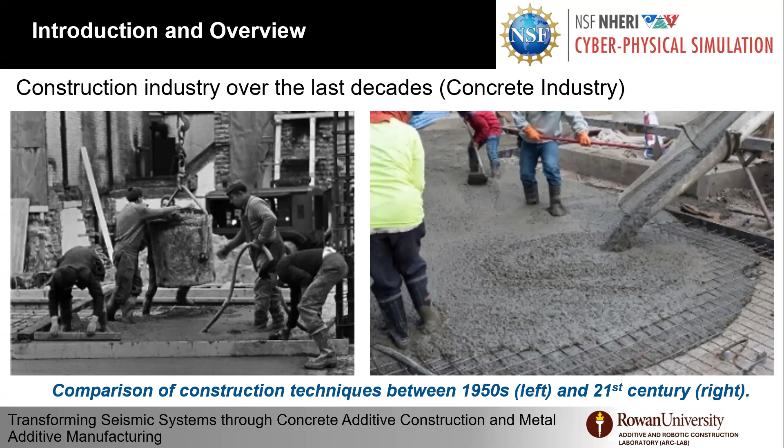But I just want to make sure that we are doing the same business over almost a few decades the same way. And my presentation is not intended to be a replacement of those methods. It's just introducing a new construction technique, a new manufacturing technique that could go hand in hand and solve problems that exist in the conventional way of making steel and producing concrete structures.

So in the background, I want to be able to have the audience engage with me. So I'm using ISO ASTM 52900 for additive manufacturing processes. You can see here, ASTM recognizes only 7 techniques. The first one on the top left side is sheet lamination. It's basically gluing steel sheets with adhesive to build your structure. The second method is material extrusion, and this technique is actually suitable for concrete, metal, and polymers.

And binder jetting is basically using the powder on the bed and using additives or binders to glue them together. This also is suitable for concrete, metal, and polymers. Material jetting is mainly polymers. If we keep going, powder bed fusion is metal and polymers, and there are different processes like direct metal laser sintering, selective laser sintering, selective laser melting, electron beam melting, and selective heat sintering. The other technique here is vat photopolymerization, that is mainly for polymers, using UV light for curing resins.

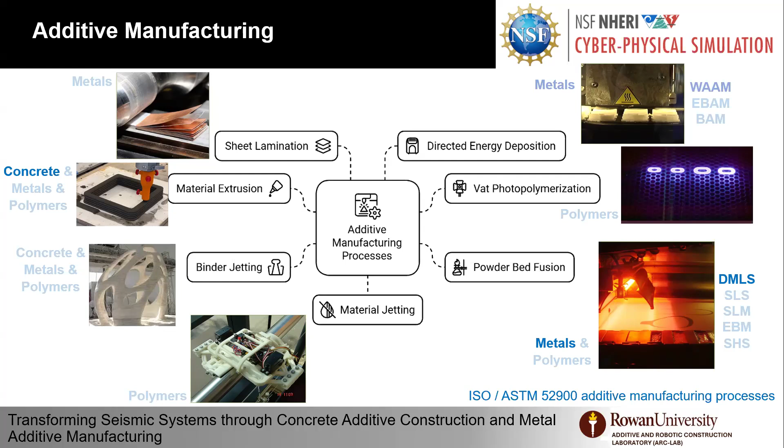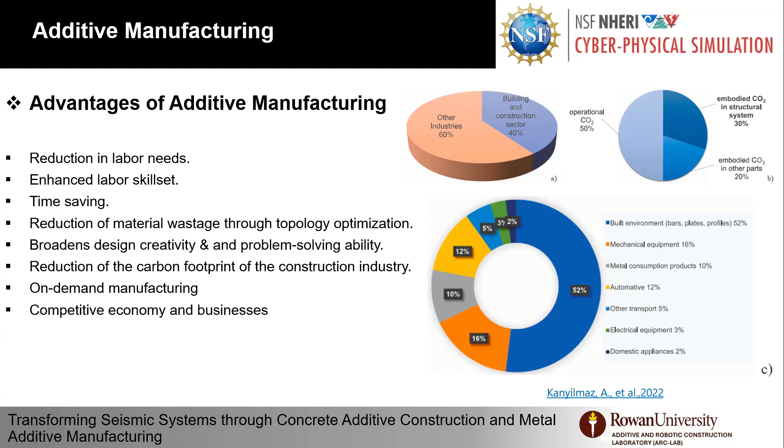So what are the advantages of additive manufacturing? We can actually reduce labor need, enhance labor skill set, save time, reduce material wastage through topology optimization, broaden design creativity and problem solvability, and reduce carbon footprint because we now produce more optimized structures. We're not wasting material in low stress regions. It also could introduce on-demand manufacturing. So if you have a hazard, you can actually print elements to respond to this hazard, and also provide a competitive economy and businesses, especially small businesses.

So I'm going to be changing between concrete and metal, so please pay attention with me here. So the first one is concrete additive construction. Our lab classified construction into three techniques. The first one is conventional construction. We've used that for decades. So using formwork, placing reinforcement, casting concrete, stripping formwork, you will have a structure.

Most of the techniques that we have right now for 3D printing of concrete rely on what we call hybrid construction. So basically you 3D print shells or forms, place reinforcement, and post-process by casting. What we try to do at our lab is to have a complete inline process where we can 3D print or additively construct structures with inline reinforcement, and also use topology optimization to create compression-only structures and tension-only structures.

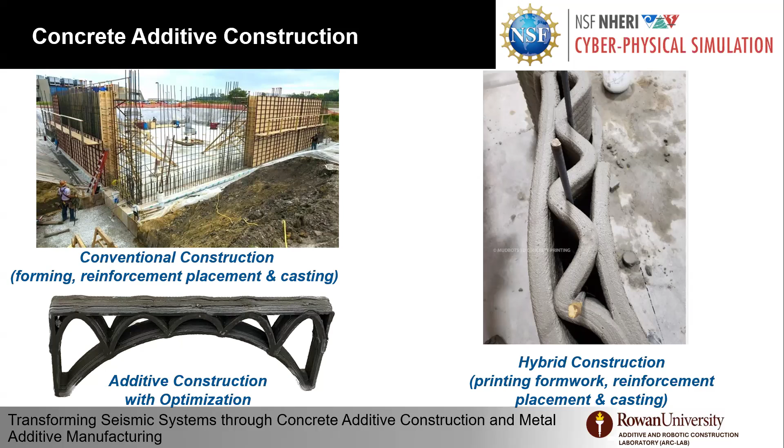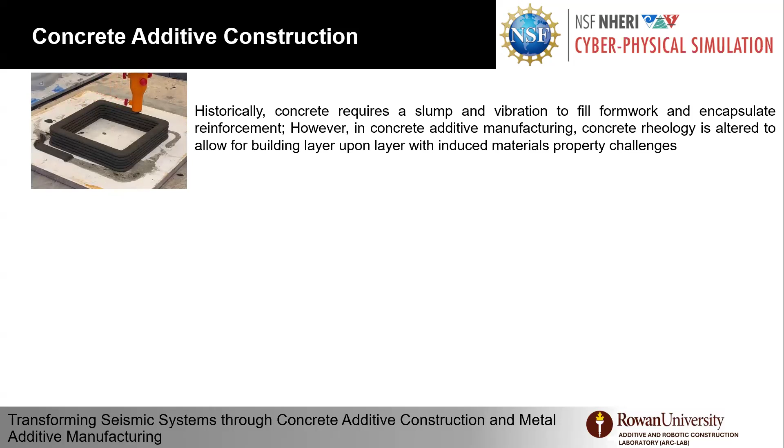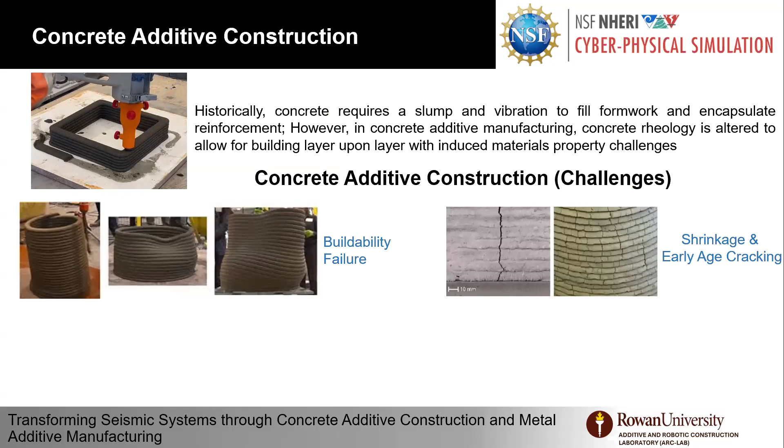This is not for a structural application, it's mainly for material development, but there are a lot of challenges in this process. The first one, you will get some collapses and learn from the collapses. The material is fresh, gaining strength over time, so there are buildability failures. There are also shrinkage problems, cracks due to shrinkage, and also early age cracking.

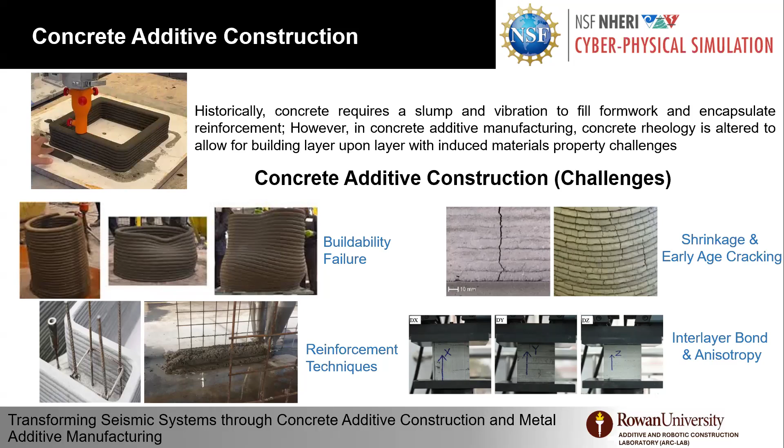And we also have interlayer bond issues and anisotropy due to the layer by layer nature of 3D printing. So you basically could have material properties change in the X, Y, and Z directions. I'm going to jump back to metal.

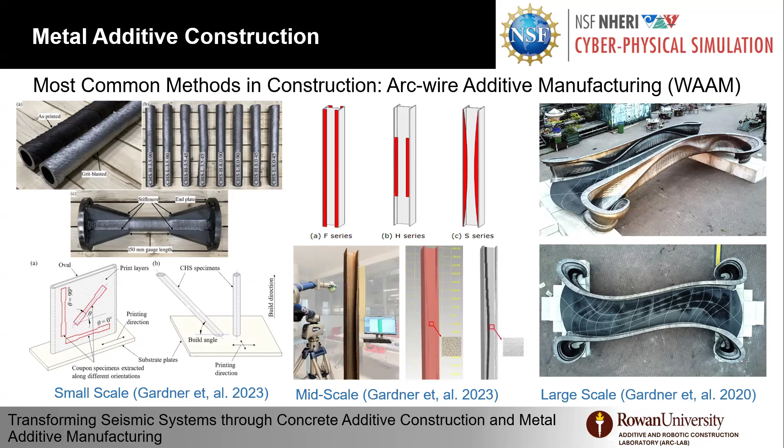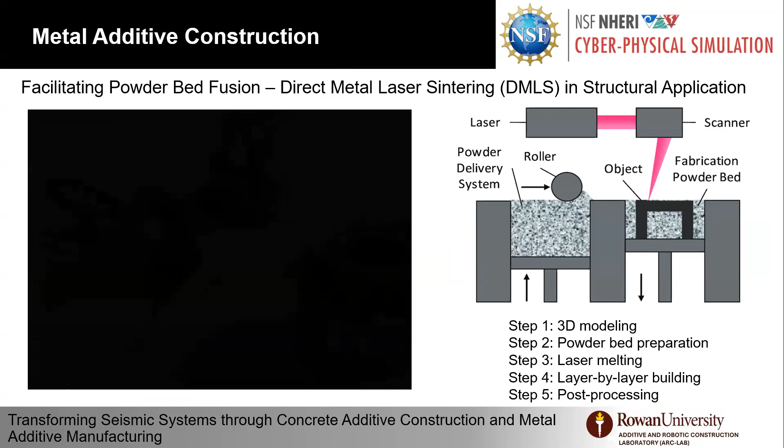However, in our lab, we actually try to use powder bed fusion, with the technique called direct metal laser sintering, in structural applications. As you can see here in the video on the left side, we can create objects using metal powders and a laser to sinter the layer as we intend. As you can see here, an object is melting or sintering inside the printer, and you can keep building the structure layer upon layer.

The big challenge in this technique actually is the build volume. The printers are limited in size. Even now, there is a lot of advancement. I was able to discuss with the company that now we are able to print like 5 feet by 5 feet by 5 feet objects.

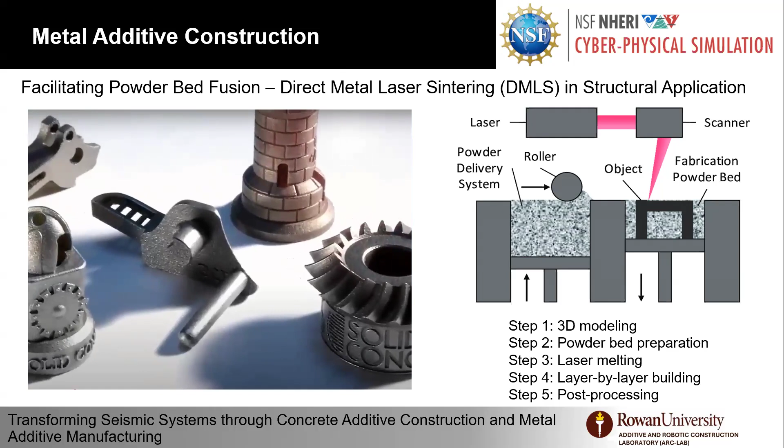So the technique here, we have 3D models for sure, powder bed preparation, using a roller to slide the powder, using a laser for sintering and melting, and building layer by layer. The layer height in this technique is actually the particle size of the metal, so it's like 40 microns, and it also may require post-processing like heat treatment.

So here are the factors that could affect mechanical properties. For sure, the powder used: we can use stainless steel powder, titanium powder, or nickel. The laser power, the scanning pattern, scanning speed, layer thickness, bead blasting, and heat treatment. Those also have impact on ductility, ultimate strength, modulus of elasticity, yield stress, anisotropic behavior, and fracture toughness.

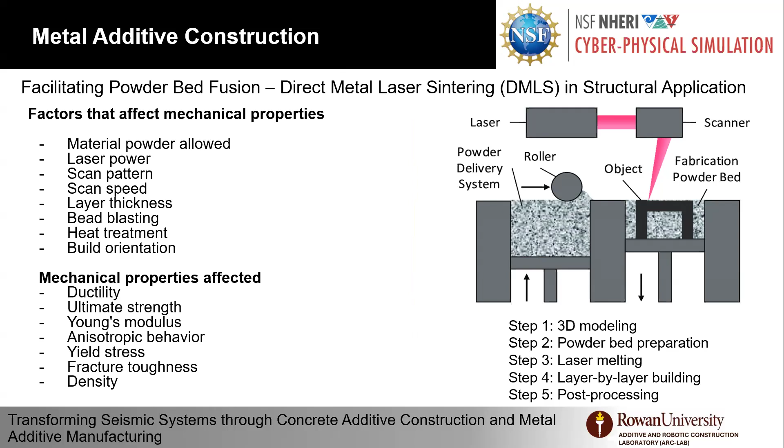So here I'm done with my background. So I'm going to spend some time introducing our lab. So our lab here is myself. I have 4 PhD students in our group. Jenna is working on topology optimization for both concrete compression-only and tension and compression structures. Anthony is working on a rocking system that we're going to present today.

Ali is working on a very nice project developing material for in-air and underwater 3D printing. Hamdi Farhood is working on all the steel-related research in our laboratory, from additive manufacturing to other non-additive manufacturing applications. And Zain Hanoun is a master's student working with us on developing material for 3D printing.

So our lab focuses on 2 research areas. The first research area is, as I mentioned, concrete additive construction. A lot of work in topology and structural optimization, developing hazard protective systems, lower carbon concrete material, lower embodied carbon, inline reinforcement techniques, and multifunctional structures.

In the metal side, we work on topology optimization, hazard systems. We also have at Rowan University a cold spray laboratory. We work in collaboration with the chemical engineering department to repair corroded steel structures, and a research area that we are starting very soon is material printing.

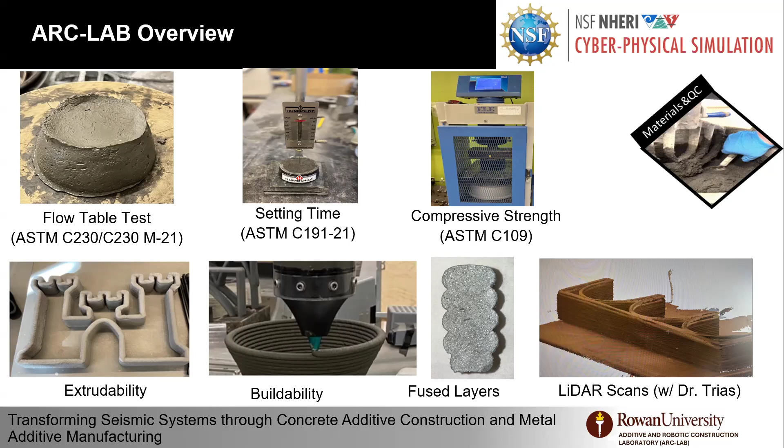We also collaborate with Dr. Trias from Rowan University on using LiDAR to capture geometry and identify cracks as we print. Here are the systems that we have. We have 3 different systems. We have a printer called SCARA Elite Roadrunner. It can print a 20 feet by 7 feet by 7 feet print volume. So it's about 6 meters by 2 by 2 approximately.

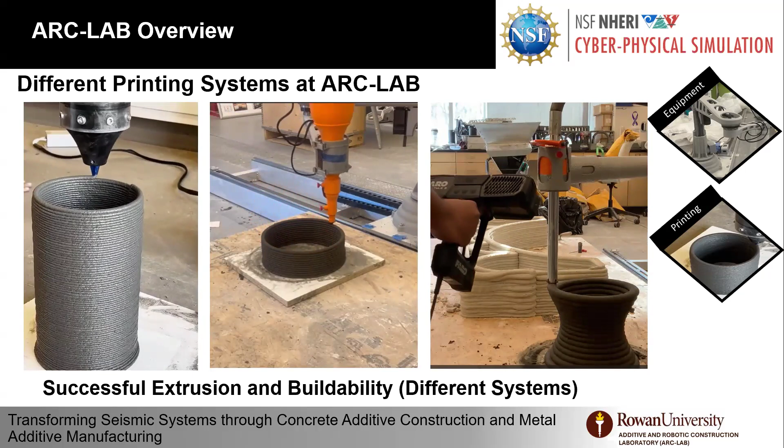We can use small tubes to print very small cylinder elements, with the 8 millimeter nozzle on the left side. In the middle, we also have another system that enables us to print from 8 millimeter up to almost 1.5 inches. And we have on the right side here the 3D printing with full utilization of the equipment using the pumps that we have in our lab. So basically, the right side is where we use the pump.

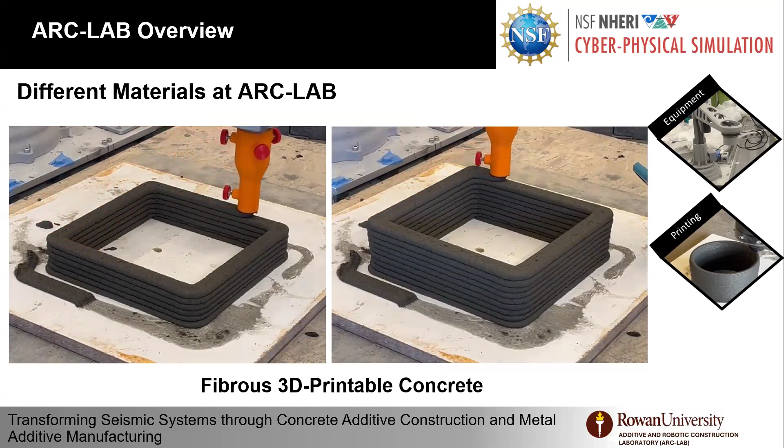We also develop materials. We realize that the material is brittle, as concrete, as you know, always is. So we incorporate fibers into the material, steel fibers of different lengths. We were able to print with 4.5 millimeter, 6 millimeter, and up to 12.7 millimeter steel fibers. So as you can see here, we are using the square as a benchmark for cutting samples, testing cubes and flexure beams, and make it like a standard for the quality of the print. We also take pride in the quality of our prints.

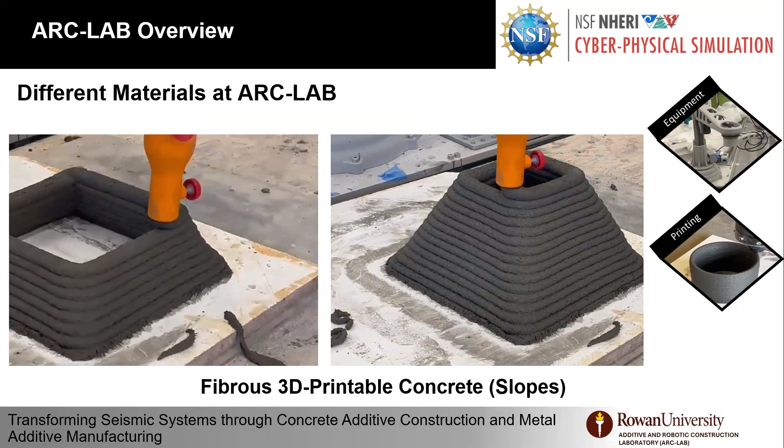We actually were able in our laboratory to print in slopes up to 50 to 55, even 60 degrees from vertical position. You can see here we start from the base, almost zero slope, and gradually change the slope as we go up. And as you can see here, a lot of the material is still fresh, it takes like 60 minutes to start setting. So a lot of challenges as we print, and a lot of deformation that happens in the layer that we don't see, but it's micro scale. And as you can see here, it's able to withstand the load, especially the first few layers, which have smaller dimensions.

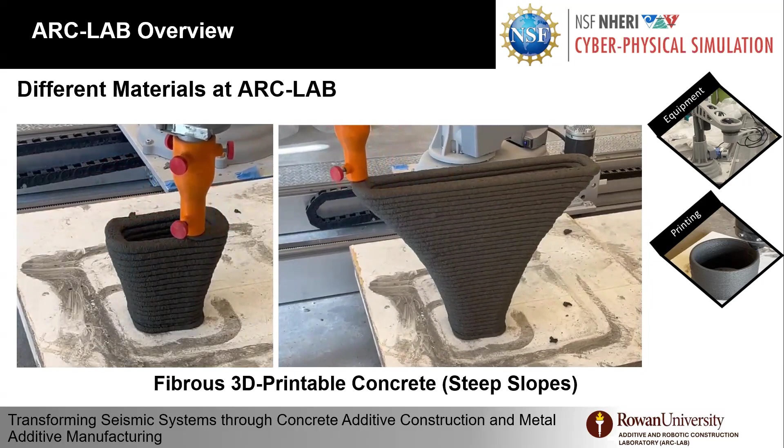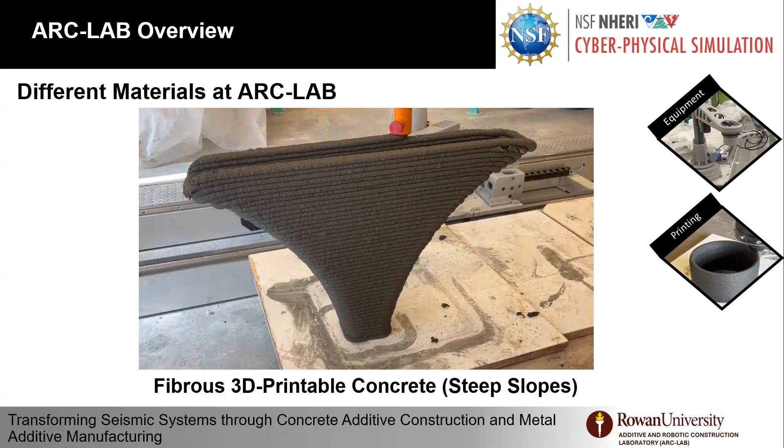We actually test also what's called stress testing. So we print until we fail to understand the material behavior. So as you can see here, we keep printing on a slope, and this one, if you take a tangent at the end, is almost like a 65-degree slope, but with a lot of deformations on this overhang. As you can see here, the material is almost hanging in the air, and now there's like a fight between the material trying to collapse and trying to hold itself, and that's actually the slope that you can say is a safe slope to print.

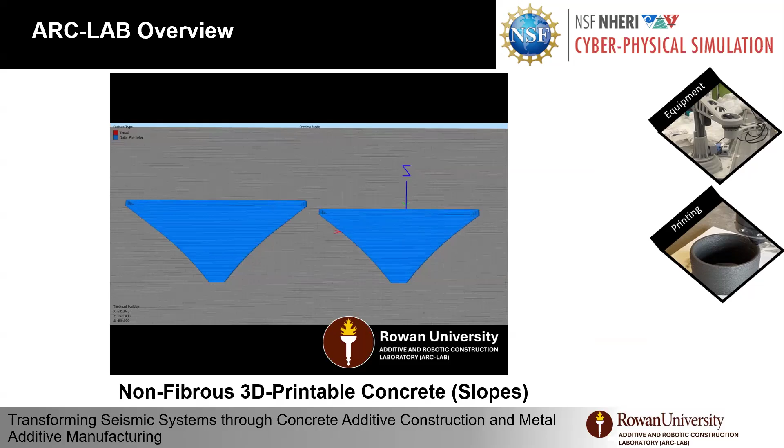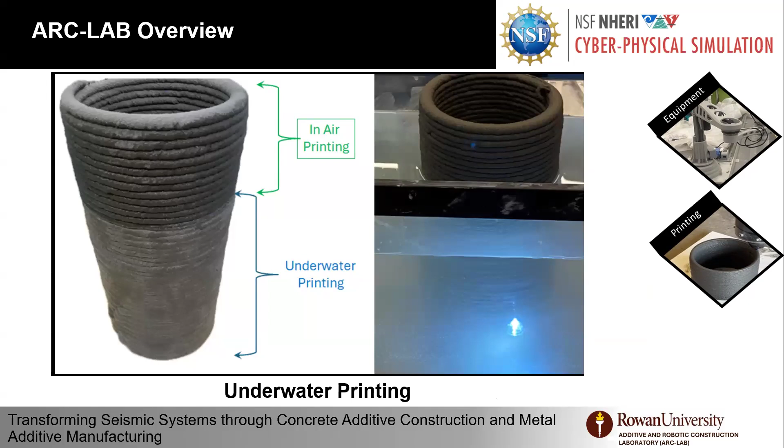We also have research that started as an idea in November 2023, where we actually tried to 3D print underwater. So the idea here is to 3D print in water tanks and understand the material behavior and interaction with water. There are a lot of challenges, more than in air. You can say that water buoyancy can help reduce the weight of the structure, or the gravity inside the material. But there's a lot of interaction because concrete is cement, a water-based material that interacts with water, and there's a lot of washout that happens.

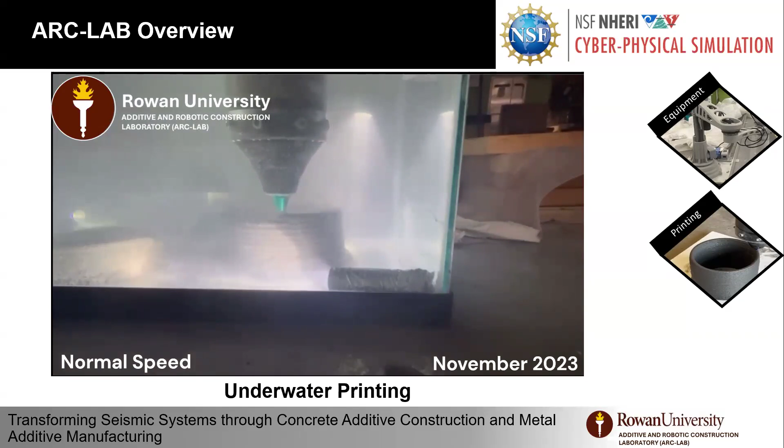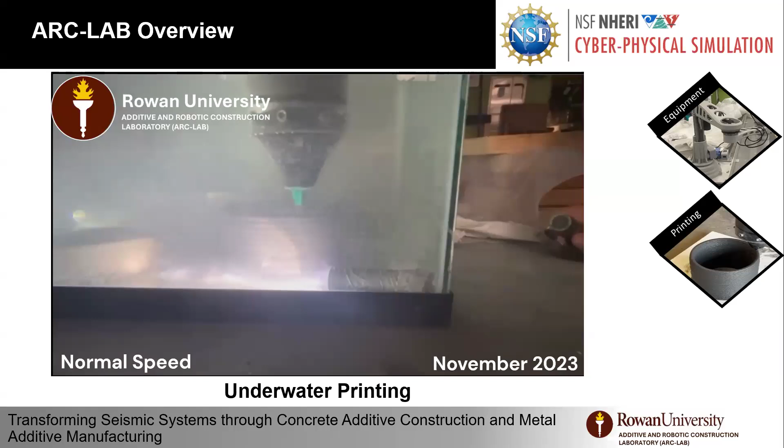So here is a video showing 3D printing underwater in a water tank that we did in 2023. The idea was to print underwater and off water, and there are a lot of applications for that: bridge casings, repair, and even artificial reefs in the water if needed. So you can see here, we just jumped the video to the end, and we are able to print our structure underwater and off water.

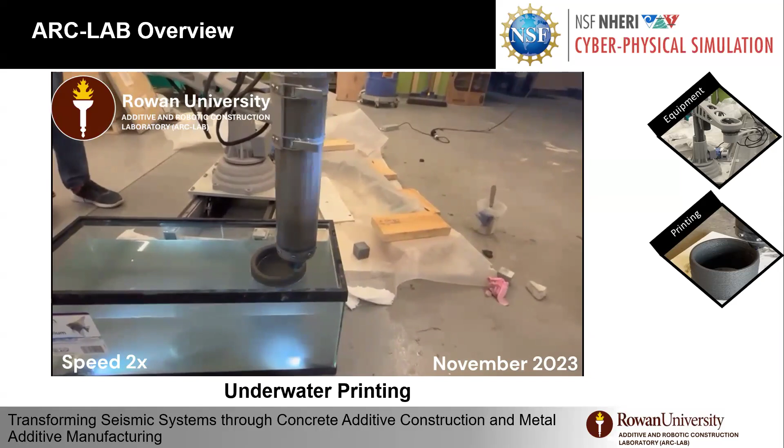I don't want to spend like 2 minutes watching this video, but at the end of the day, you can see that the same material is extruding underwater and off water. So we have an active research area on understanding material behavior underwater and off water for new waterfront construction. So I think this is enough prerequisite material to start the actual two projects that we're trying to start here.

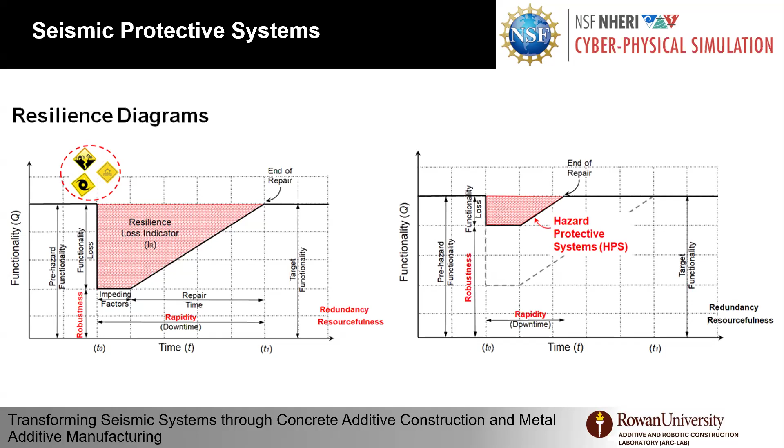We have a column end with rough surfaces that later had concrete cast around it for a socket connection. We also have end tubes to protect the concrete from spalling. We also have unbonded rebar for energy dissipation through yielding as the structure rocks. And the top connection was a reduced concrete section to accept the end of the pre-stressing. The rebar was also connected to the cap using holes that were all grouted together.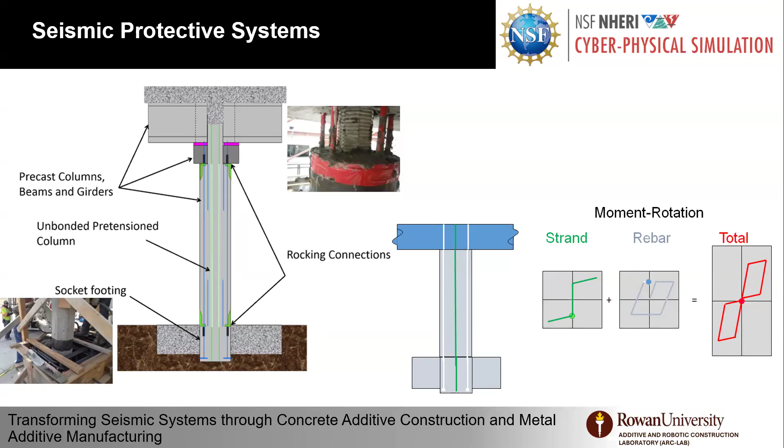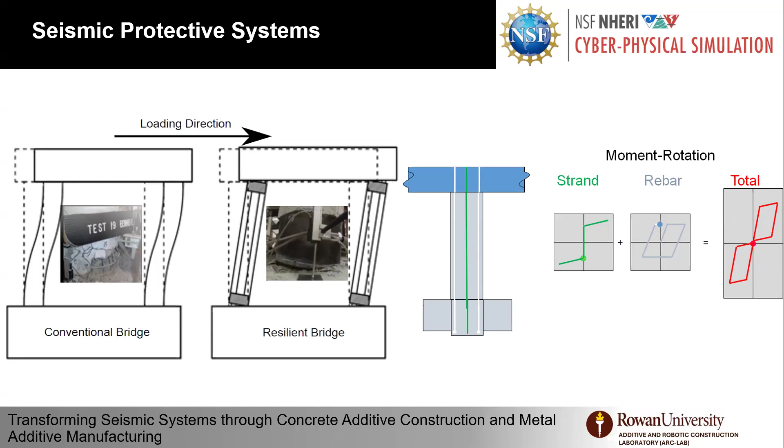So the system relied on the pre-tension to self-center, while the rebars dissipate energy through an internal yielding mechanism. As you combine them in the moment rotation curve, you can achieve self-centering. So we compared the system to a specimen that was tested in 2004 as a conventional bridge system with normal design, where we observed a lot of concrete damage, rebar exposure, buckling and rupture, and that's because we actually shifted the behavior from flexure and buckling into a rocking behavior.

So here is the specimen at the University of Nevada, Reno, a 72-foot-long bridge at quarter scale. As you can see here, we are using this ground motion, 2.3 times the Northridge earthquake, and as you can see, the bridge is rocking back and forth on predefined interfaces between the columns and the foundation, and the column and the cap.

There will be a zoom-in view in a few seconds to show you how it rocked back and forth. And after the earthquake, you can see how vertical and plumb the column is, compared even to the background steel frame. As you can see here, the rocking is back and forth, and thanks to the pre-tension pre-stressing that brings everything back.

We faced a lot of challenges in the aftermath of this testing, because a lot of ruptures happened in the rebar that we were not able to inspect because everything recentered nicely. However, as you can see here, the tubes actually prevent the visual inspection too. As you can see here, the only crack that happened to the column was at 13 percent drift ratio.

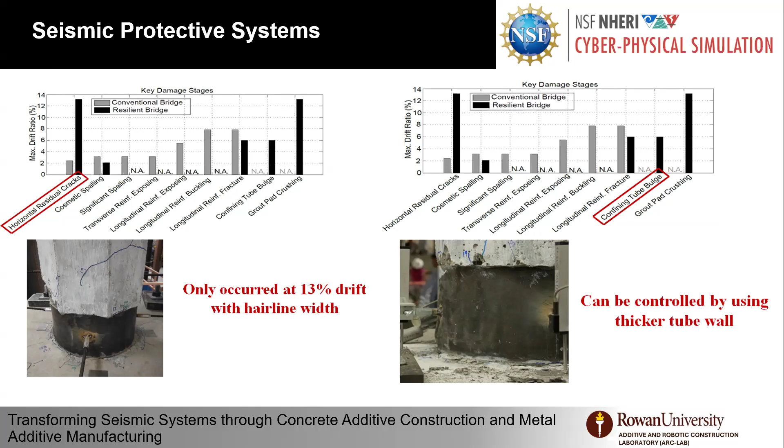It rocked on the surface. The foundation also got some cracks and spalling due to the rocking motion. The steel tube at the end had a bulge due to the high dynamic loading. We also had a big challenge here where, before we saw cut, we actually knew that the rebar fractured from the sound as they fractured during the test.

We did a lot of post-processing using low cycle fatigue and acoustic emission to identify the fracture. We tried to verify that, so we saw cut all the connections, and you can see here all the outer rebar fractured, and that was a really big setback because we try to make sure that we can have a resilient system that resumes functionality quickly. It was good for the purpose of emergency vehicles because the bridge is still standing. However, after recovery, you have to replace it.

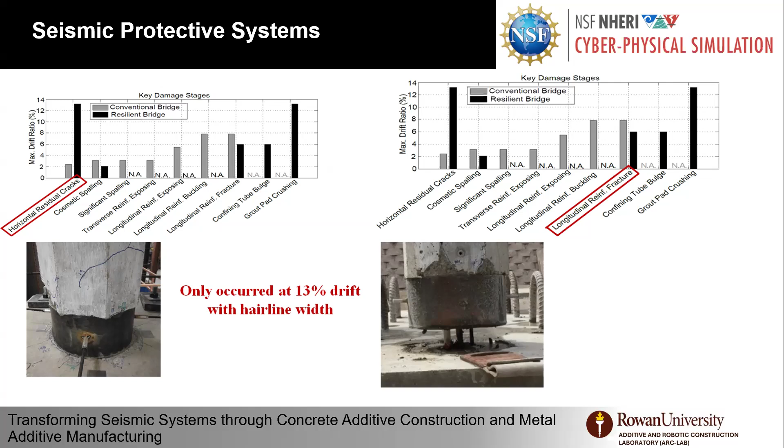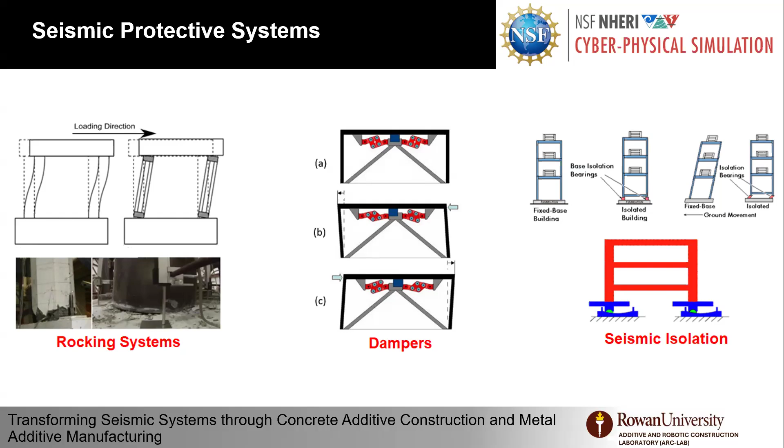So we thought, can we enhance the system? So first, we tried to study different systems for seismic mitigation in bridges. The first one is the rocking system, as we discussed, and the use of dampers, either liquid dampers or friction dampers, and also the famous seismic isolation, which basically shifts the period of the structure to reduce the acceleration of the structure. We thought, can we actually get the benefit of all these techniques using a new system enabled by 3D printing?

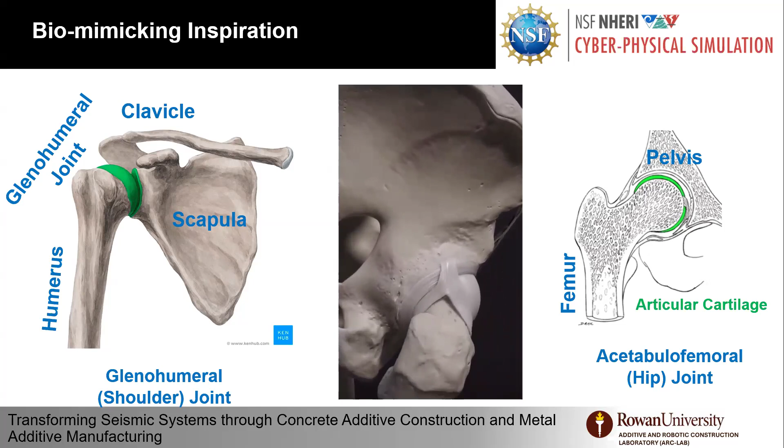So we also thought of bioinspiration, the way that we have our joints. The first one is shoulder joints. You can see here a lot of curvatures and ball and socket connections to allow free movement and mobility. Another joint here is the hip joint, rotational in all degrees, and it enables mobility. And also, in the ball and socket connection, you have articular cartilage, which is a soft tissue to damp the movement. In our body we don't like friction because it's painful, but we can use the same concept and be inspired by those to build a new structural system.

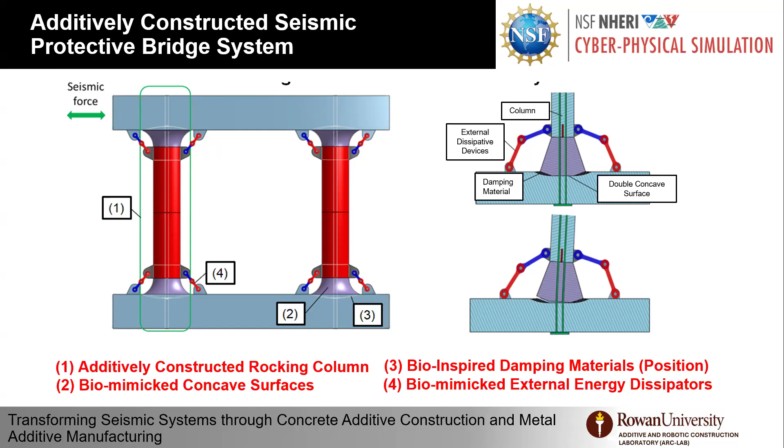So here, what we tried to do is one-directional loading first. We have the additively constructed rocking columns, post-tensioned and not pre-tensioned in this case, with a unique end design based on concave surfaces. We can explain why we are doing that in a moment. By positioning a damping material, inspired by joints, we can also achieve damping of the forces and energy dissipation to substitute internal rebar. We also thought of using external energy dissipation based on rotational friction.

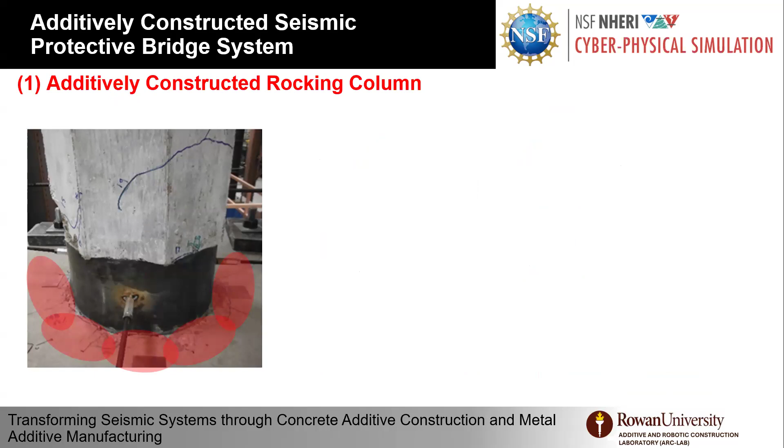As you can see here, the first challenge is that the foundation and cap have to be capacity protected: no cracks, no spalling. We got some cracks and spalling, mainly because of rocking on a cylindrical element that rocks back and forth on one point or corner. So it concentrates a lot of stress on one point and results in cracks. So our solution was to 3D print the column with an end design that has concave surfaces, generating a rocking surface as opposed to a point concentration. So the column will be an additive construction post-tensioned rocking column.

As I can explain here quickly again, as we rock back and forth, at every moment of rocking you have stress concentration at those four points. And our goal is, as we rock, to have double concave surfaces with different curvatures. So as they rock, they meet together and create a better distribution of stresses on the foundation. That's actually also what we have in our shoulder joints.

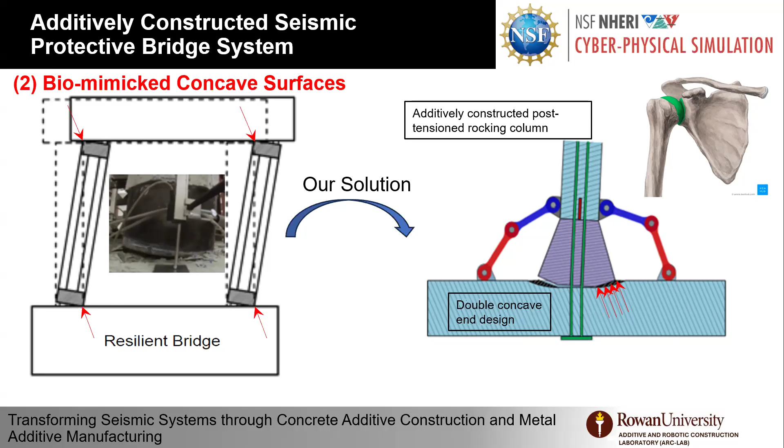For the internal rebar that fracture, we thought of using different techniques. It could be one of those, or it could be also a combination of both. The first one is basically using damping material that could be rubber material or even high density polyurethane to embed it in this gap. So as it rocks, it allows deformation, but also dissipates energy by deformation.

And one example here, as I mentioned, high density polyurethane, where we have very low stresses, almost 30 psi, similar to the tire pressures that we have, but it maintains this force based on the vertical strain for up to 45%.

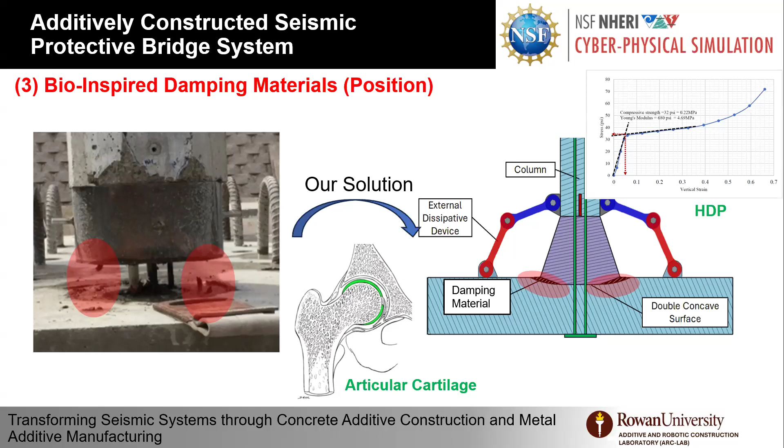The second technique is external elements using rotational friction. It's assembled in a kinked configuration or deformed configuration. So as it rocks back and forth, it enables energy dissipation by rotational friction. And this is also similar to what we have in our hip joints.

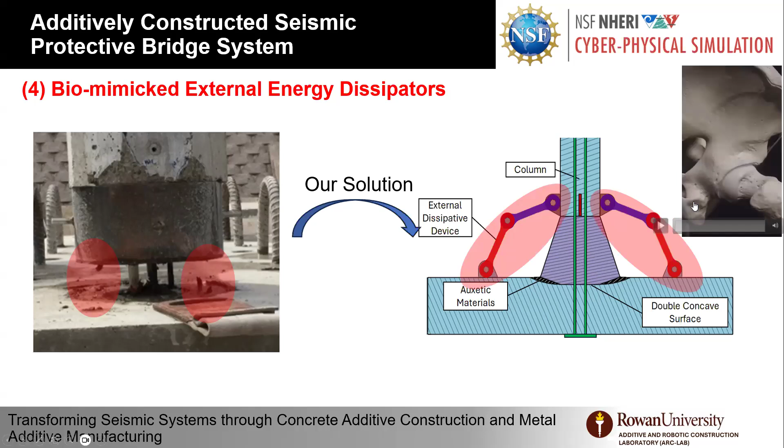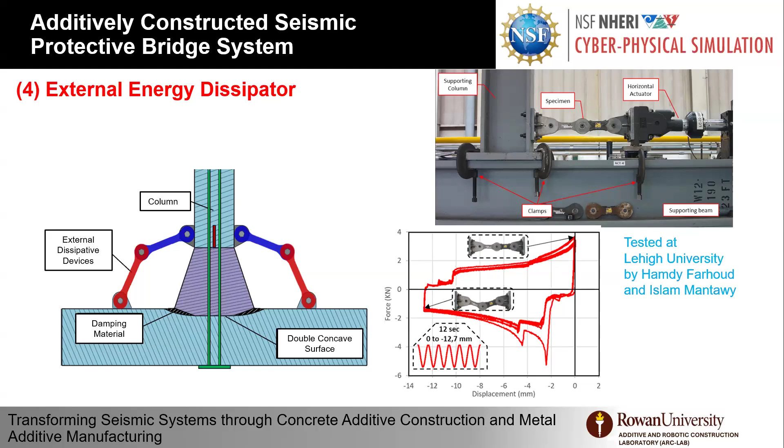And we, in fact, conducted a test a couple of years ago here at Lehigh University on those small devices. As you can see here, we tested in the bent configuration, and this one was only to test the compression side. So we don't have individual tension or straightening of this element. And you can see here we have very reliable cycles of energy dissipation.

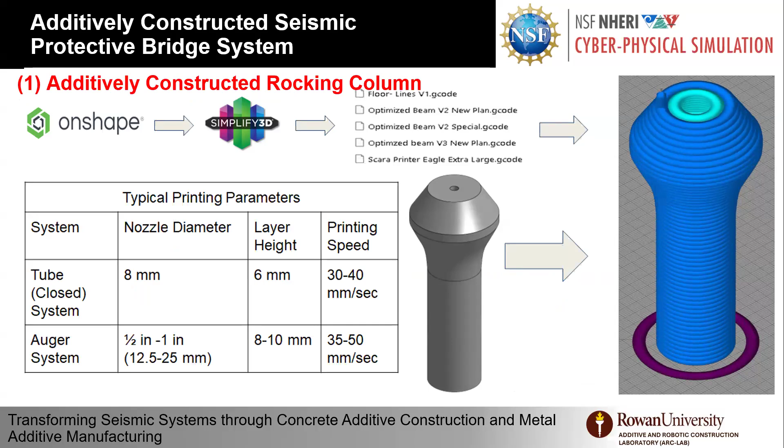For the 3D printed column, we designed the column, and as I mentioned before, we're able to take advantage of free geometry to create the socket connections of the end design. So we're able to actually 3D print this column. And in this research, we are at a stage now of testing the joint itself.

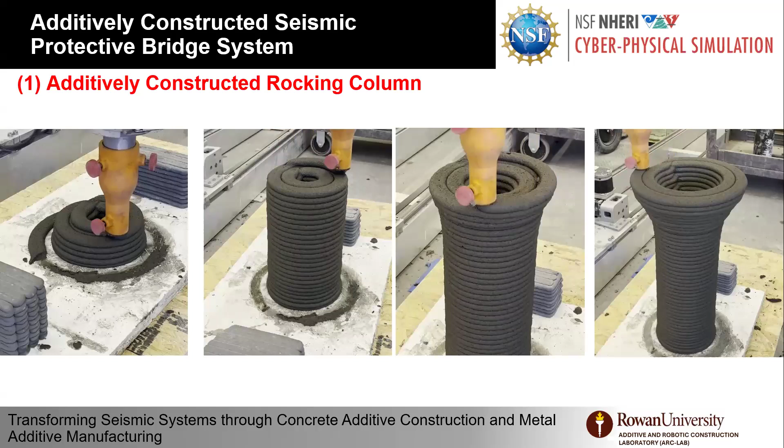So we 3D printed this one, and the video here is showing a quarter, sorry, a quarter, half, 3/4 and the end. I won't spend so much time on the videos, but here is the end of the printing. You can see here a high quality print, hopefully you can see, and we're able to finish the print for this scaled connection.

So our goal now, we understand that what I presented before was like the column sitting on the foundation. We really need a shear block to block the shear movement. So what we have done here, we brought the column into the foundation, and we will be continuing constructing this specimen and testing at Rowan University, and hopefully the full scale at Lehigh sometime in summer or fall, hopefully.

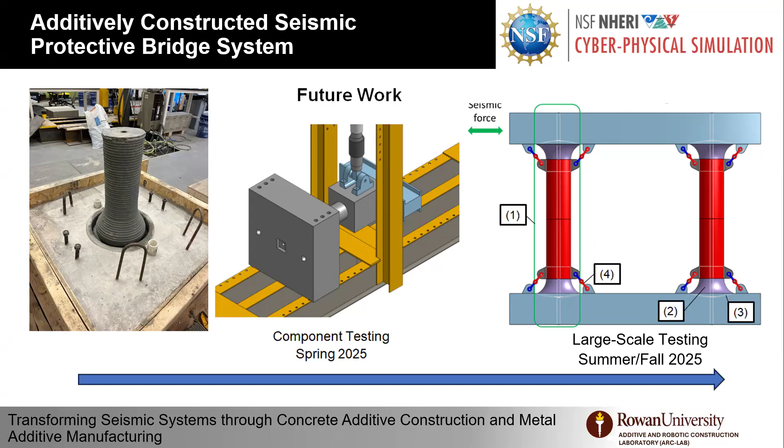So the second project is we are using metal additive manufacturing. We're developing new seismic fuses that can be part of concentric brace frames and other brace systems. So here we are going to switch from concrete to steel. So a special concentric brace frame. You see those on the West Coast for a lot of buildings. They provide stability as we construct.

However, in seismic movement of the ground motion, the diagonals in the brace frame dissipate energy and act as big fuses. So it's yielding in tension, buckling in compression, and they could eventually fracture due to low cycle fatigue. On the top right side of the slide, I'm showing the test done at the University of Nevada, Reno, 2019, for long duration effects on concentric brace frames, and the research revealed that with long duration, you could expect the fracture to happen earlier due to low cycle fatigue.

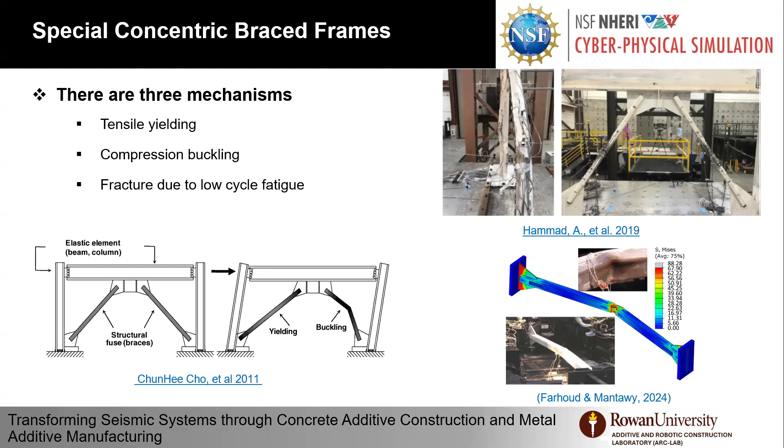Our group works in verifying numerical models for existing tests that were previously done in the US. So what we thought about is, instead of having a very long bulky element here, which is the brace that we need to repair or replace, or eventually replace the building because of the damage, because we cannot repair the building, could we actually segment this into 3 zones or 2 zones where we enlarge the outer element here, as you can see, so we keep them capacity protected, so no yielding, no buckling, while we concentrate or localize the damage only on those fuses in red color.

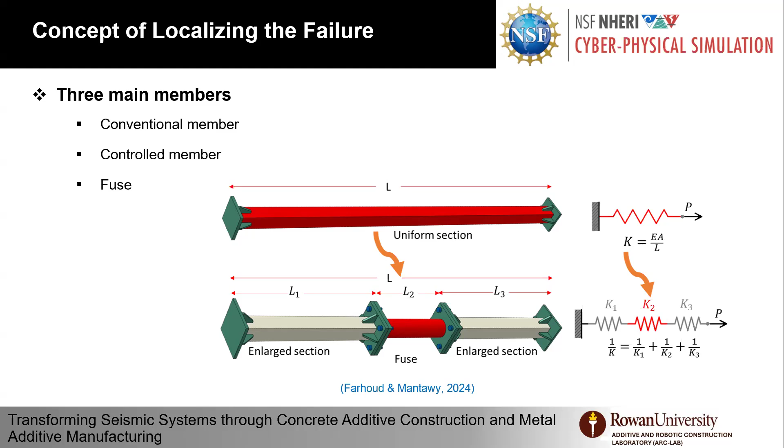And we went through topology optimization and structural optimization processes to size the fuse so that we achieve the same energy dissipation, tension, and compression, and system stiffness as the original concentric brace frame. And as you can see here on the right side, I'm showing the stiffness for both one brace and what we call hybrid brace. So in a system, what you can expect on the lower side of the right figure, you can see that one brace alone dissipates in this manner, yielding in tension, buckling in compression.

The brace itself as a system is symmetric because every brace is changing tension and compression depending on the direction of the ground motion. However, the top 2 options that we have here, we have two designs.

One is double funnel, the other one is C design or cylinder design. So our goal here is to create those fuses that emulate the same behavior of the brace, protecting the part of the brace and enable replacement of those fuses after earthquakes.

Those fuses, thanks to metal manufacturing and thanks to high steel alloys like 17-4 PH stainless steel, with higher strength enable us to much further reduce the length of those fuses. Because if you want to do it actually for a normal steel, it's going to end up to be the brace itself.

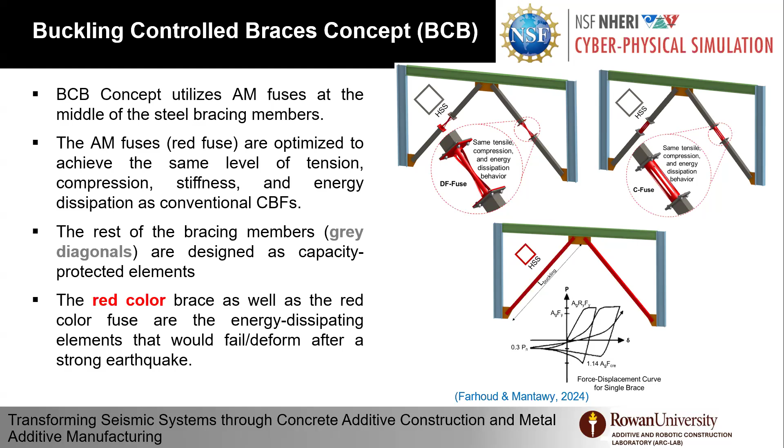So in this project, we move from topologies and structural optimization, a lot of numerical simulation, to finite element analysis using our software to size the fuse and verify the fuse. We're also, in collaboration with industry, able to 3D print fuses and test them. And hopefully, in this part of the project, we'll be testing the hybrid fuse.

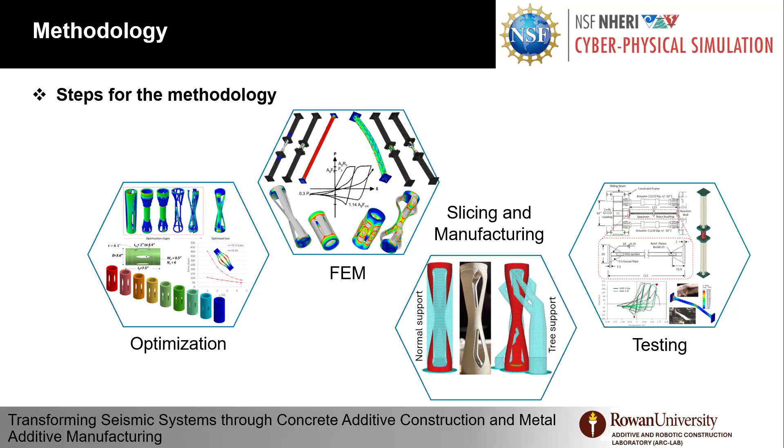So this process starts, as for any optimization, by identifying the objective function, which is minimizing the strain energy on those fuses. And our design variables, the materials are different, the shapes are different. We have constraints, equality and inequality. And we also try to reduce the volume of our material.

So here we can see the stages of optimization. We end up with this shape, which is in this red box on the right side. And we further enhance it, make it printing friendly using this double funnel design. However, we can also come up with this different design that is cylinder in shape with vents and openings that enable these vents and plates to buckle. So basically, we are using the buckling theory to just get those plates with those materials to buckle in the same way as the bigger, larger elements or braces.

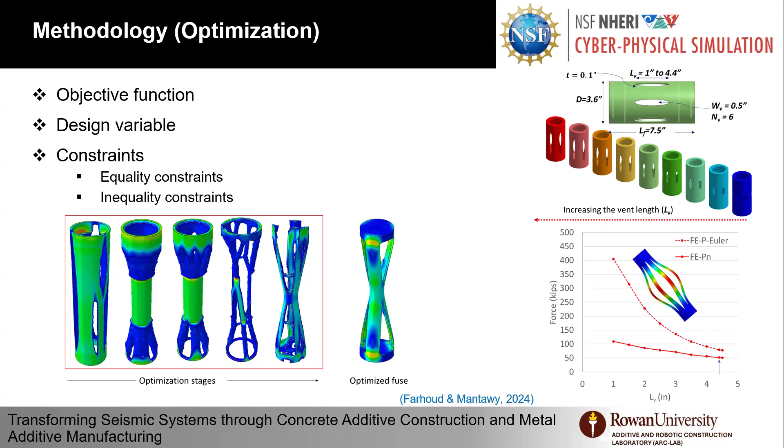So as you can see here, we have 5 different numerically tested specimens. The first one is just a regular conventional brace. Second and third are the hybrid ones with, in the middle, either the double funnel or cylinder fuse. And the other ones are just the cylinder fuse itself, by tension pushover, compression pushover, and cyclic loading.

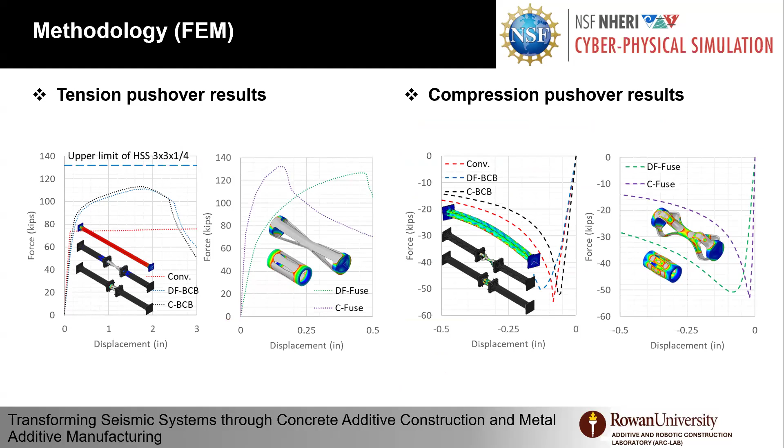So in tension, as you can see here, our hybrid systems surpassed the conventional, but we are still under the limit of the capacity-protected element and outer element, so we are in good shape. On the compression side, we get really close to the compression capacity of those conventional ones.

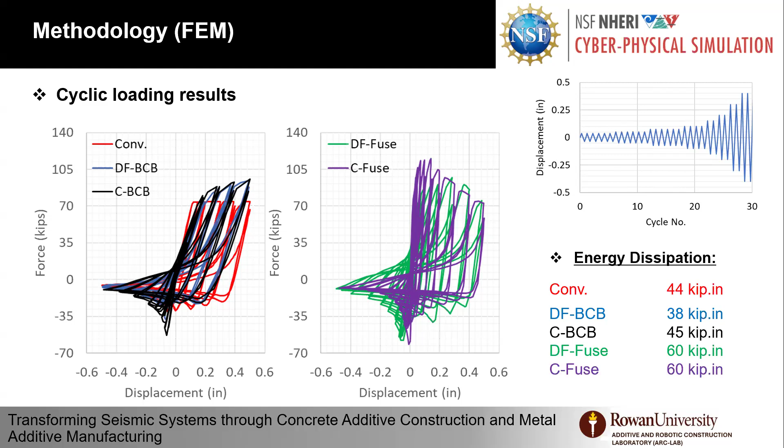Under cyclic loading, you can see on the left side the energy dissipation for the 3 systems: the conventional one, the hybrid brace with double funnel and cylinder elements, and the energy dissipation numbers on the right side of this slide. And we're able to get a technique that we can further optimize our fuses to achieve whatever energy dissipation we target. So a lot of numerical work has to be verified with some testing.

So we did actually test a small design, a scaled version of the fuse. This fuse was manufactured using metal powder bed fusion, using direct metal laser sintering or solidification. This is a printer, EOS M290. And as I mentioned before, the particle size of the powder is 40 micron. And the material that we used is EOS 17-4 PH stainless steel.

17 is for chromium content and 4 is for nickel content. So this is how the PH stainless steel is defined. We also did heat treatment after the printing up to 900 Fahrenheit. Here is the stress-strain curve for the material that we used, especially for numerical simulation.

So stress at 0.2% is around 170,000 psi. Tensile ultimate strength is 190,000 psi. Modulus of elasticity 28,500 ksi. And here I'm showing the specimen. The specimen height was only 2.5 inches, and the weight 25 grams. And the thickness of each plate was around 1 millimeter.

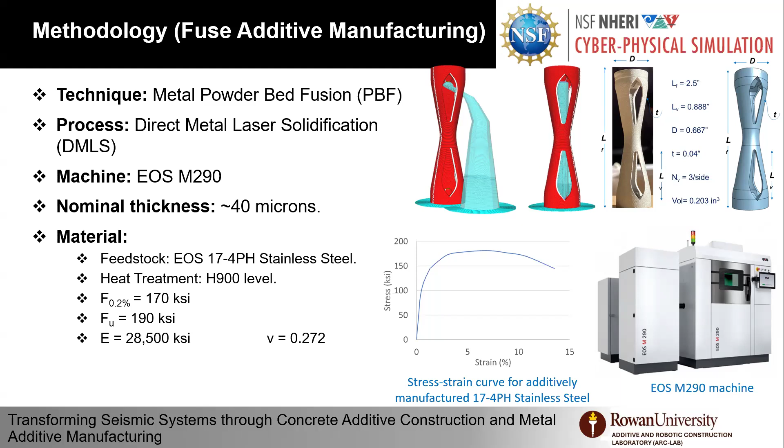And I want you to guess how much in compression this specimen carried. It carried 81,000 times its own weight. It carried around 4,500 pounds.

I'm not sure how many elephants that is. It's like elephants on top of those.

So the process itself starts with preparing the build plate for the DMLS process using the powders that we use, 17-4 PH stainless steel, and rolling continuously, sintering layer after layer. As you can see here, this small dot in the second figure from the left on the bottom side shows you a solid dot, which is actually the outside circle perimeter of the bottom and top side of the double funnel.

On the top right side, you can see here a mountain of powder that the specimen is embedded in, and you have to excavate to get the specimen out. The specimen now is detached from the build plate, undergoing heat treatment up to 900 Fahrenheit, and after that, bead blasting to make it look like steel. It is a steel, okay?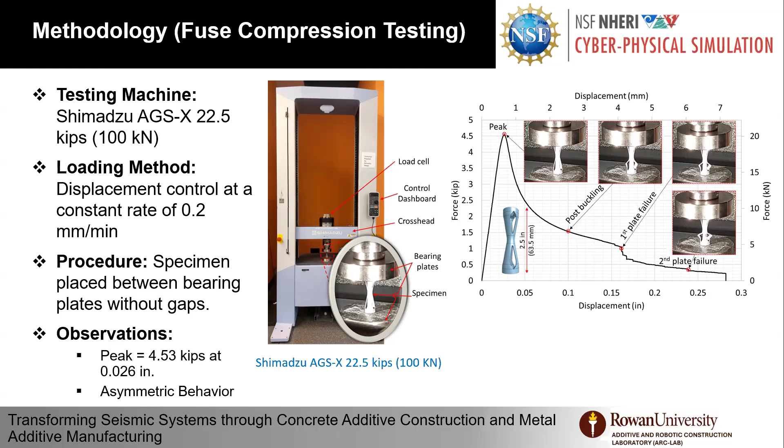This is due to the imperfections that happened during the process. Some of the powder maybe was not centered completely. So one side is always going to be stronger than the other side. It actually inspired us to do the cylinder design because we don't want to waste material too. But since we have the specimen, this is actually the force displacement curve.

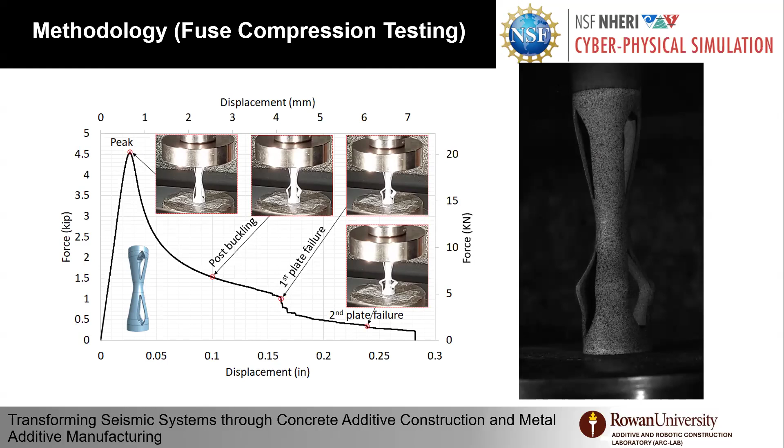You can see the lower three plates are deforming, buckling, and all that plate buckling capacity is actually what we try to mimic in the large brace or conventional brace. And when we finished, we decided to machine the specimen, reclaim the undamaged part, and test it again to verify that the undamaged part is stronger.

And we tested that, we achieved around 4,700, so it's around a 5 to 7% increase. And this also translates to the quality of the printed option. You don't need to have one side much stronger than the other side, but you can have them fully synchronized in strength, matching the strength.

So we did a lot of numerical simulation using Abaqus. We're still on the verification side of it. This is the blind prediction before we start doing the iteration. We get the behavior. We are still stiffer in the numerical models. There is a lot we're trying to do with the digital image correlation data that we gathered during the test to actually model the material, because what we used is just a stress curve for this material. Our goal is to actually test those braces.

As you can see here, some of the specimens are fabricated, and we will be able soon this summer to optimize the fuses, place the fuses in the middle or the end, test the hybrid system, and hopefully protect the outer element and localize the damage in those fuses and replace them. After an earthquake, those fuses can also be melted down, the material reclaimed and reused for other applications. So there is also an eco-sustainability component to that too.

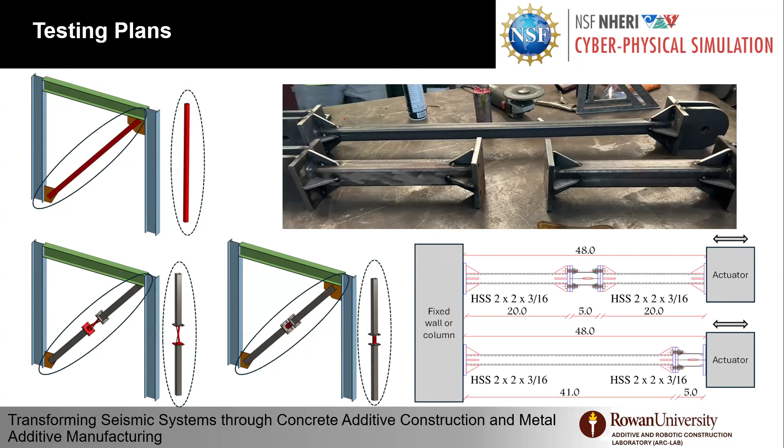And think now of an earthquake where you need to replace those elements, you don't need to have a stock of them ready. You can 3D print on demand. So this is the end of the second project. Both projects are ongoing projects. And I think there is a potential to continue for more years with more research and more testing, for example, for hybrid simulation and cyber physical testing too.

Here I'm trying to end this presentation with an open discussion. Instead of you asking me, I'm trying to ask here, but you will have a chance to ask me anyway. So here I'm asking, what are the potential opportunities for advanced manufacturing in mitigating natural hazards? I thought of some of those before this presentation.

One is we have the wildfires in Los Angeles, right? The way the wildfire is initiated, we have wood houses that actually catch fire and transmit the fire to another house, and this propagates, right? Can 3D printing of concrete houses help stop this ignition of the fire?

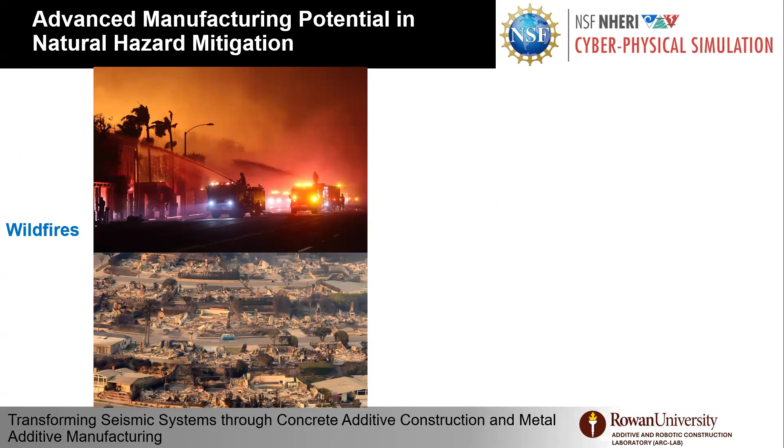For example, ICON is a big company in 3D printed houses in Texas. They actually 3D printed 100 houses. It was the largest such neighborhood in the world. It's already built in Texas, printed on site. And a lot of research can also be done for roof systems that help reduce the ignition.

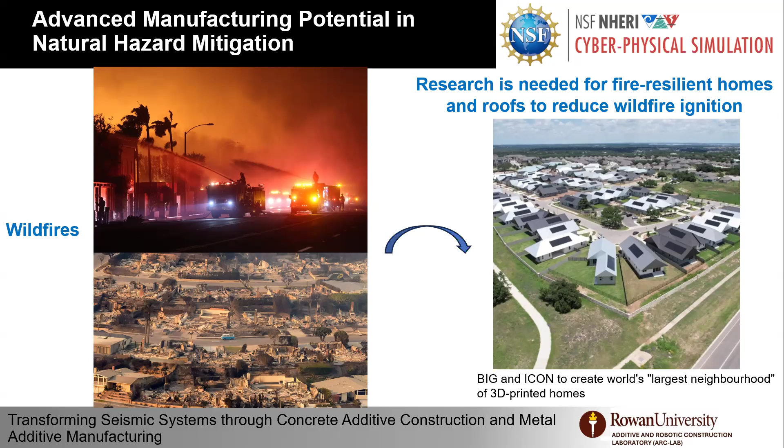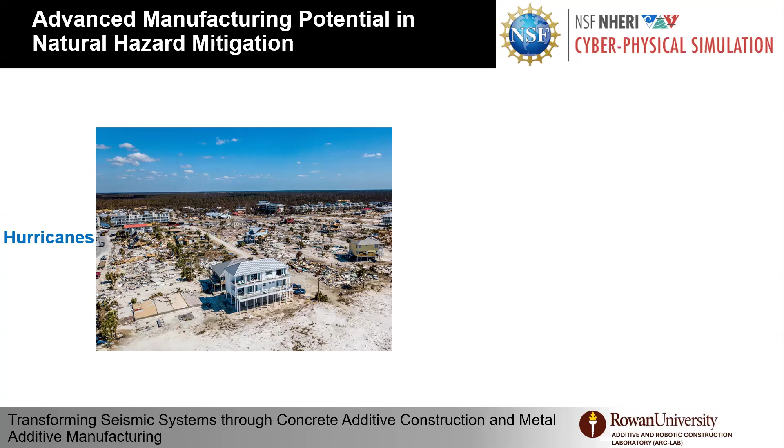Hurricanes, here is from Mexico Beach. I think this is Hurricane Michael. You can see here, this is an elevated house that was the only one that survived and everything else went out of the area. And we can see, we don't have evidence yet, but how those 3D printed homes with concrete can maybe be a better option in mitigating hurricane loads. So also research is needed to verify that.

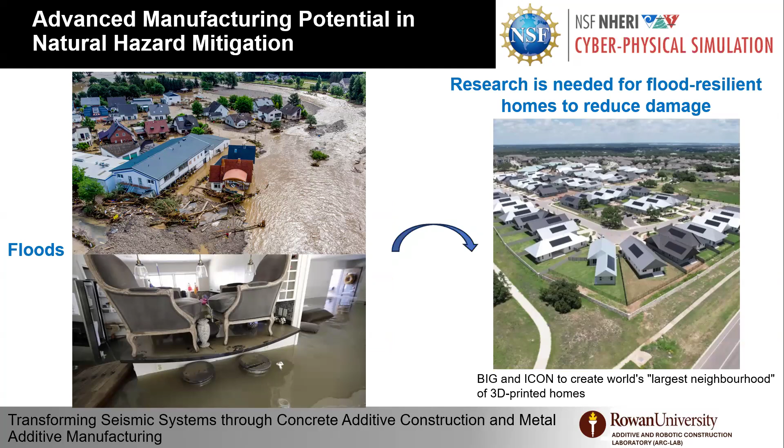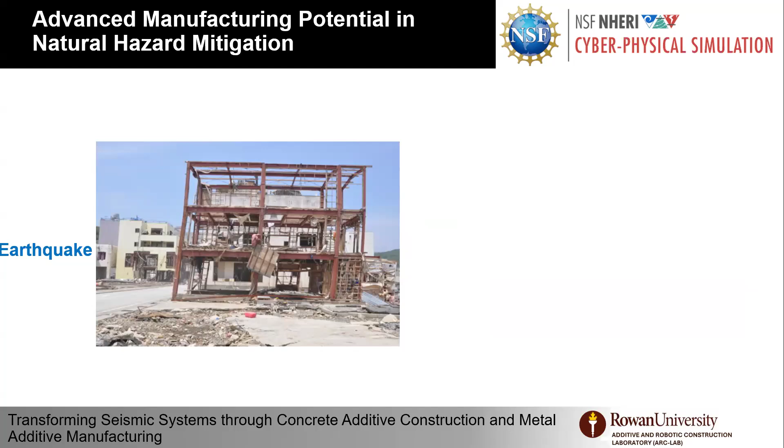There is also a component of the layers and how those layers can prevent intrusion of water during those events. Similarly to flooding. And there is also a need to verify this technique for flood resistant homes. Outside of the concrete, manufacturing for seismic steel systems, the damage can actually go to seismic fuses and those systems that can help in earthquakes that we discussed, and hopefully other research will continue with other systems.

How about coastal flooding? Can 3D printing help in coastal flooding? Yes, we have artificial reefs now. A lot of companies are interested in artificial reefs, and there's a lot of potential for 3D printing those reefs on the land and underwater and off water too.

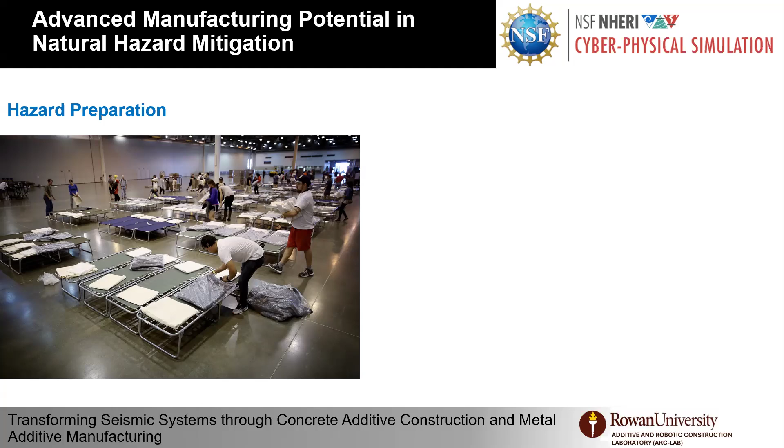For hazard preparation, you can see here shelters prior to a hurricane. We have signs of hurricanes so that we can evacuate. Can we actually 3D print modular units that can be assembled away from the site of the hurricane path? And this is actually a project that we have, but I don't have a chance to present it today. It's actually modular 3D printed walls that integrate all the utilities in them, using foam for insulation, a lighting system, window openings, and integration of pipes, that we published last year.

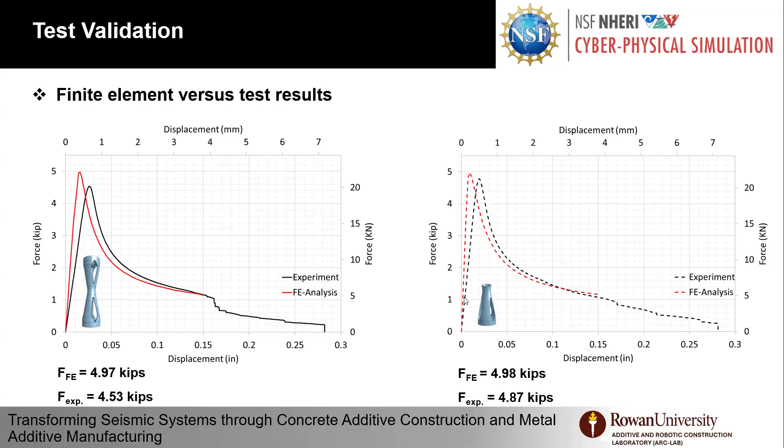Okay, yeah, check it. You want to drive it? We can see if we have any. Just go to the top and then see. Yeah.

So I can see another system connected to your 3D printer. Do you recommend an extruder pump or the auger system for 3D printing? So the question is, what is the difference between the extruder pump, using a pump to extrude right away to the nozzle, versus using an auger? We have both in our laboratory.

We prefer the auger system because we have a lot of control on the extrusion rate. So we use the pump to just deliver the material to the auger at a good rate and control the extrusion through the auger. If you have a very sensitive pumping system that you can control, that could also substitute the auger. So it's based on your situation. That's it.

Any other questions from the audience? Give them a minute. There could be a little bit of latency in the internet.

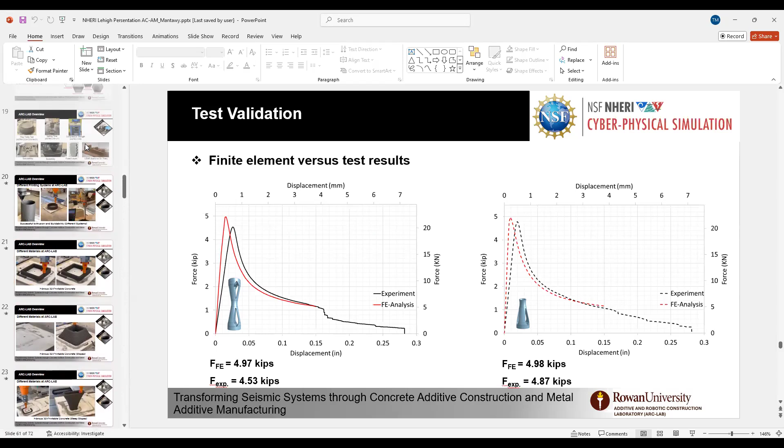This is a very hot topic that the industry didn't figure out yet. Most of what I see is printing the formwork, placing reinforcement, casting and post-processing, and that will increase the carbon footprint. In this big picture, we actually work inline as we print this shape. Let's say we are printing an I shape. We create a cavity, a robotic arm places reinforcement, we change the rheology of the material and fill it up.

Because a lot of research needs to be done on the bond when just placing reinforcement around or over the 3D print, because the idea of the bond is to encapsulate the rebar. So we are working on different techniques now. Post-tensioning is one easy solution, but with robotic construction we need a lot of good options for reinforcement. I don't see rebars and stirrups as a solution for this.

Have you worked much with metamaterials? We worked with metamaterials in the sense of exploring printing different alloys in metals. With the printer itself, you can now have each layer a different material. Have you done any testing with the mechanical properties? Not yet. We are exploring it now, but not to a stage that I can present. What kind of materials? We are using stainless steel, titanium, and nickel. Nice and expensive.

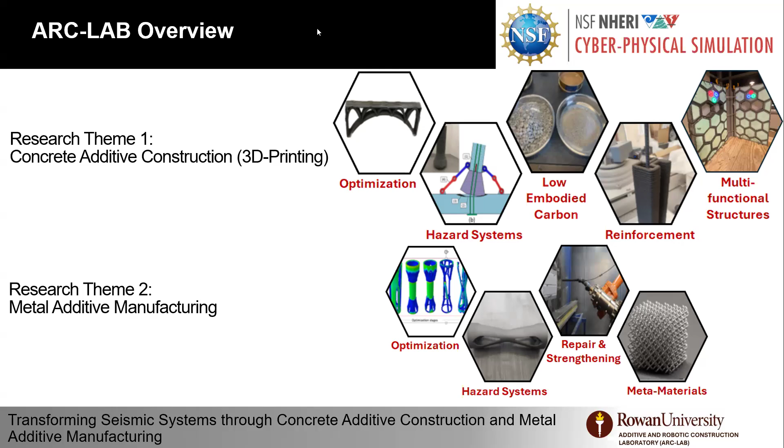I think the natural progression here was having to do